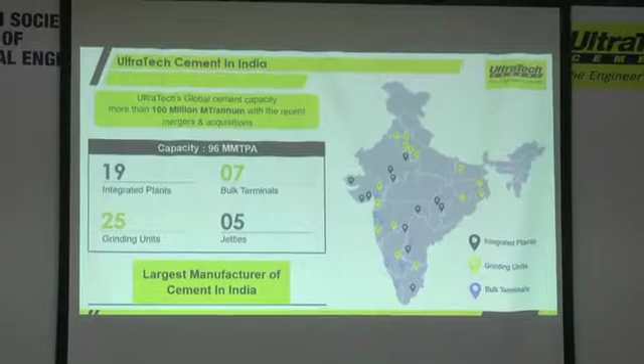And we feel proud to get associated with all the projects using Ultratech, and there are many signature projects constructed with Ultratech cement. We also feel proud to be associated with the development of India by making our cement available each and every time to all the projects which are getting constructed in the shortest possible time.

Along with India, we also have production units outside the country. We have our production units in UAE, in Bangladesh, in Sri Lanka, and we are also exporting cement to various countries where it is getting used in their prestigious projects.

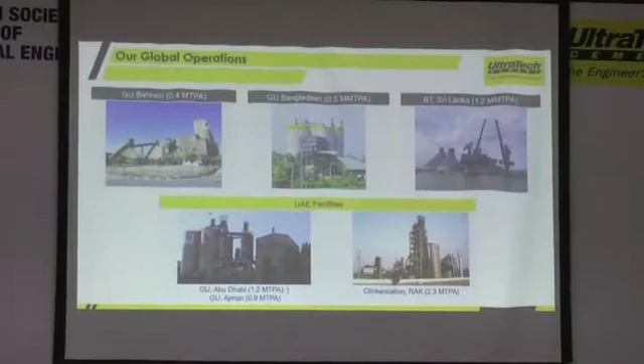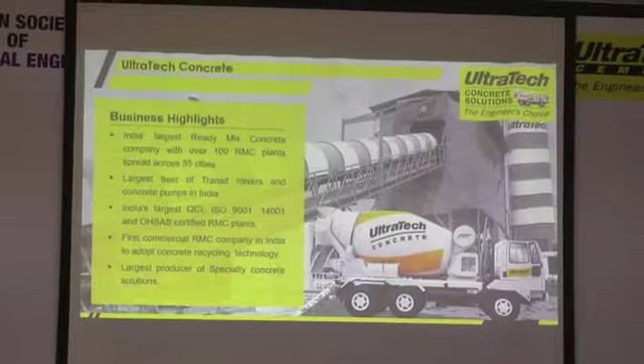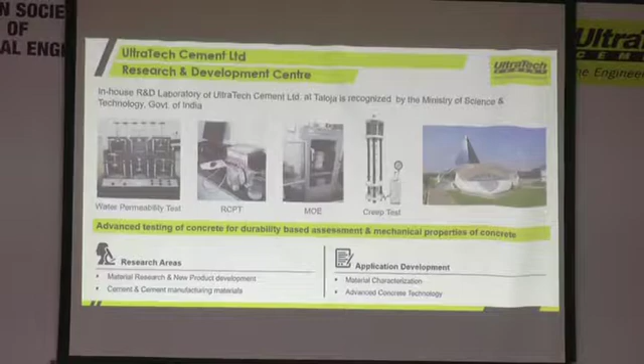Along with cement, we have RMC as a business. 100 plus RMC plants are there all across the country, and we are the largest manufacturer of concrete through our RMC plants, and we have the largest fleet of transit mixers also with us. We are producing a number of value-added concretes, apart from the normal concrete used at sites, and about 3 or 4 concretes we will have a presentation on very soon.

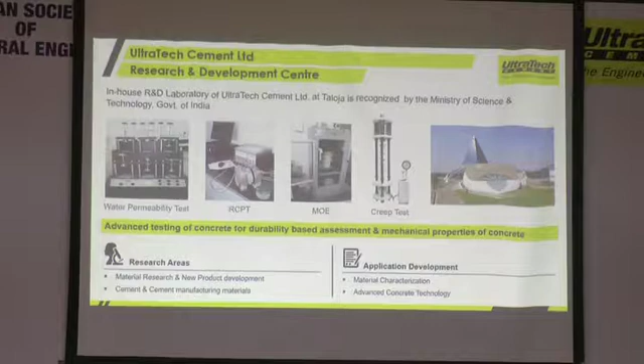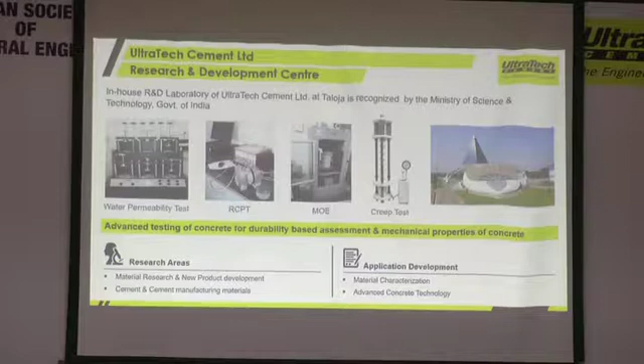We also have our R&D facility. We have developed our R&D center in Taloja, which offers a number of tests related to concrete like RCPT, rapid chloride permeability test, RCMT, rapid chloride migration test, modulus of elasticity test, permeability test, and so many tests offered through this laboratory. We are constantly doing R&D on concrete, and the results are also shown through our RMC business.

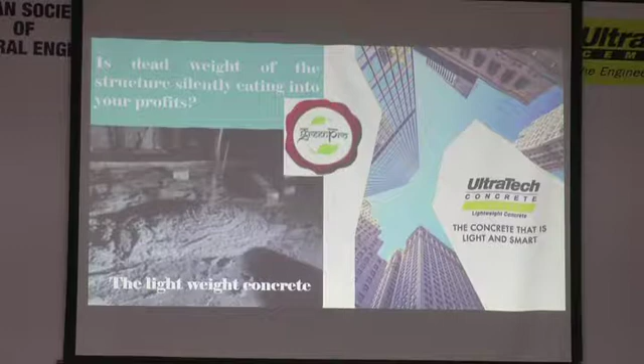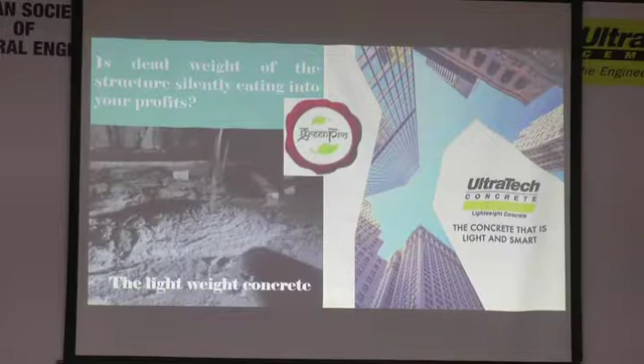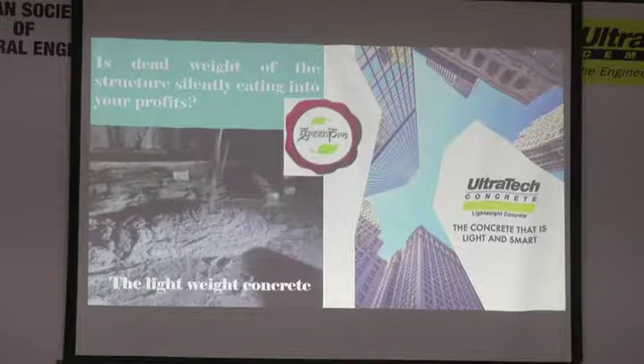We also have a building products division through which we are manufacturing and supplying AAC blocks, autoclave aerated blocks, along with dry mix products like plastering products, tile fixo, adhesives, waterproofing products. These products are made available through various outlets in Mumbai, and apart from Mumbai, all across the country. Now for this concrete product presentation, I will request Clinton to please come on the stage.

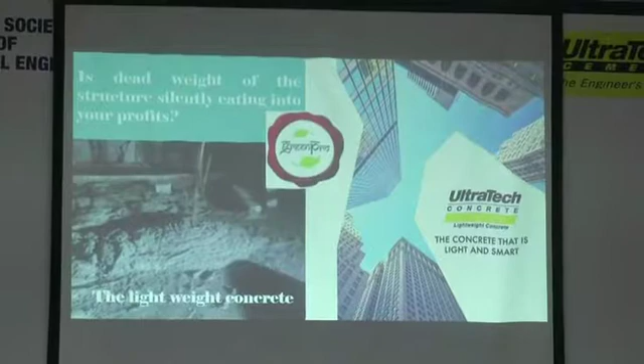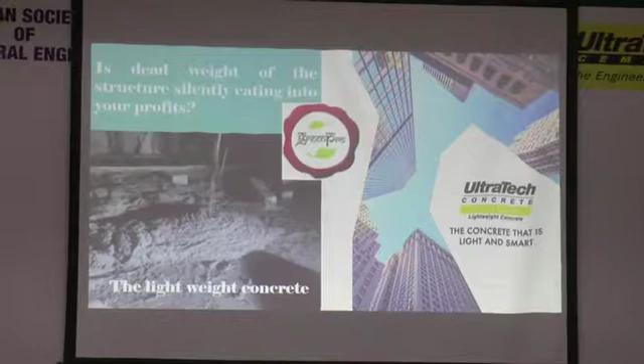First, what I'm talking about is Litecon, branded by Ultratech as Litecon - a lightweight concrete. Our concrete today has a density of 2,400, and that high strength is required for structural applications. But for non-structural applications, we don't need such high strengths, so we ask: why increase dead weight on the structure unnecessarily?

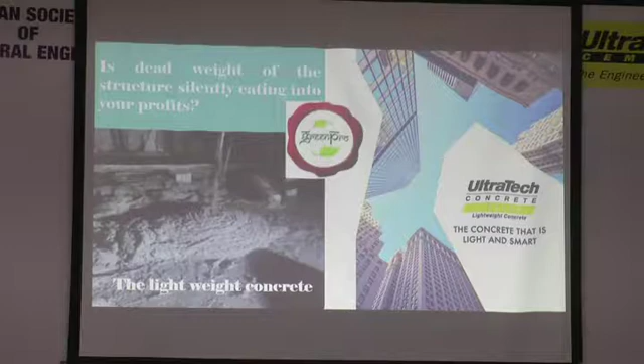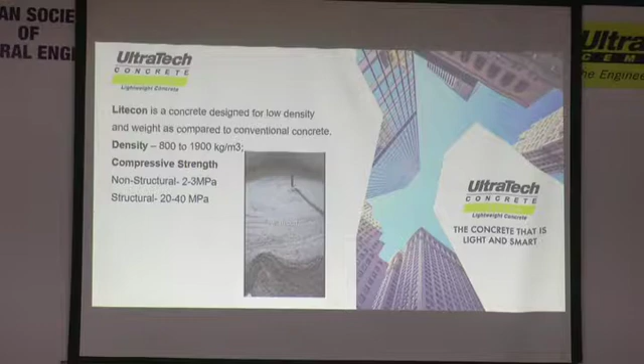This program is for the Indian Society of Structural Engineers, and many structural engineers say they don't require such heavy dead loads for all applications apart from structural concrete, so why not give them lightweight concrete? At Ultratech, we have designed and supplied concretes with density as low as 800-900 kgs per cubic meter, non-structural, gaining strength of around 2 to 3 MPa, and structural grade up to M25 with density around 1800-1850 kgs per cubic meter.

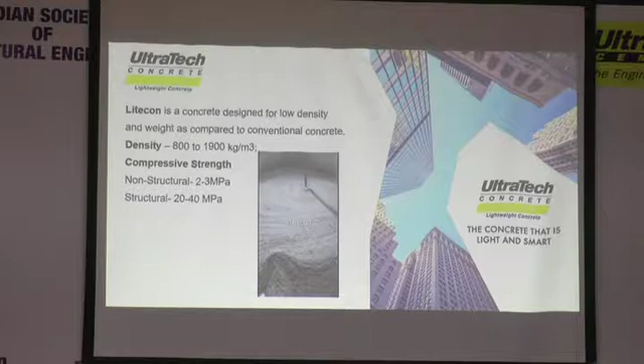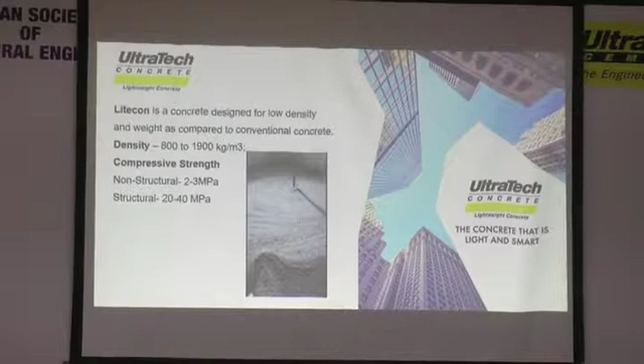With this drop in density, you get flexibility. Structural engineers can have flexibility in designing certain areas and reducing dead loads of structures. I'll take up one example.

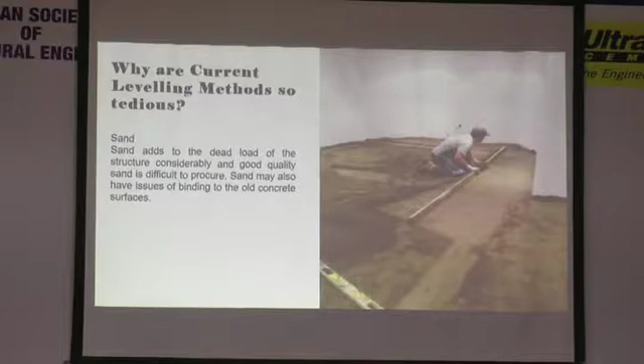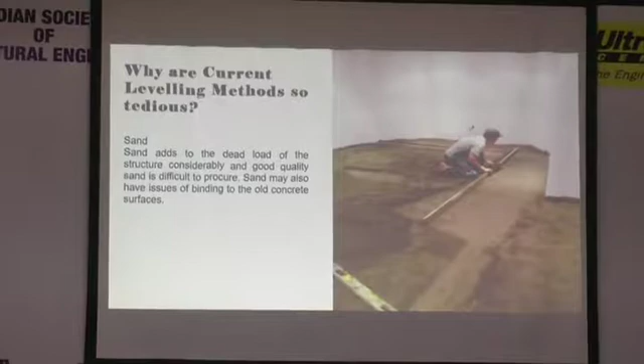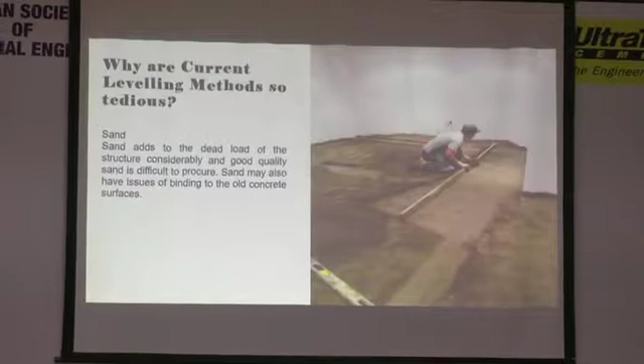Today for tiling, we have a traditional way - we go for sand bedding. If tiling had to be done in this room, sand would have to be brought from the ground floor or first floor up to this second floor, dumped at site, lifted - very labor intensive - then placed across the whole area, leveled, and finally you make cement slurry and paste tiles on it.

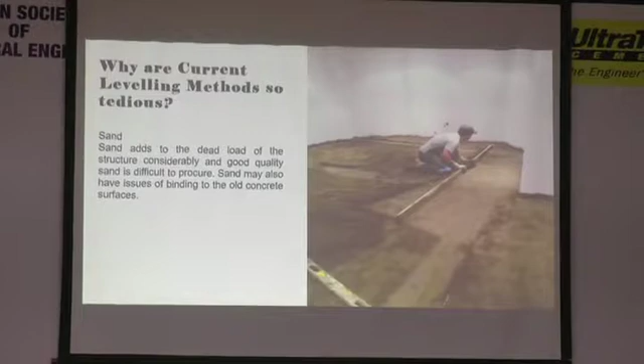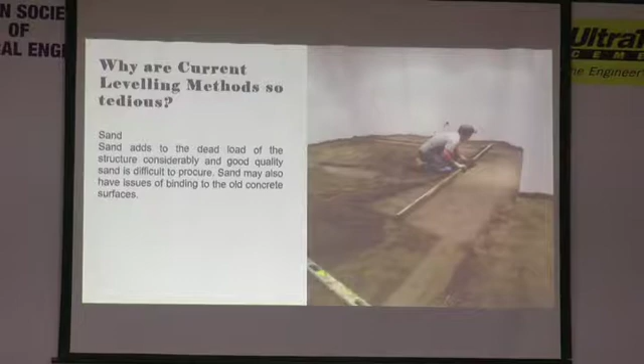Sand has a density of around 1800 to 1900 kgs per cubic meter, increasing load on your structure. We say use a material with density of say 800-900 kgs per cubic meter - a lightweight concrete. Structural engineers get the benefit of reduced load across the entire flooring area of the structure.

Second, it's fast, because lightweight concrete is placed through pumping methods. The transit mixer comes, it's pumped and placed on the floor, and you can go down to a thickness of 50 mm. Once that concrete dries, after maybe 7 days, your tiles can be stuck using either tile fixing agents or cement paste.

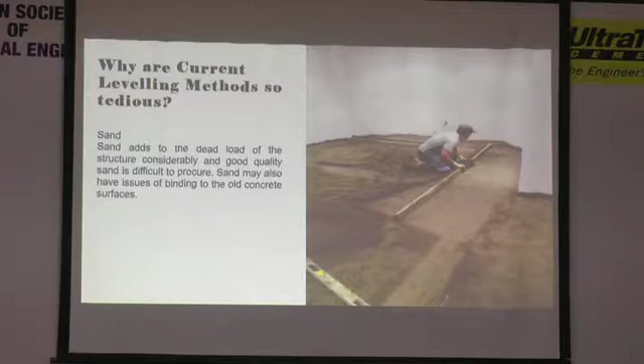When you leave this room, we have a sample lying there you can look at - 50 mm lightweight concrete with tiles stuck over it. 3 tiles are stuck with cement paste, and 3 tiles are stuck with our Ultratech Tile Fixo. This is how we reduce dead weight on the structure.

Now some people will ask, is it cost effective? Because that is a secondary consideration.

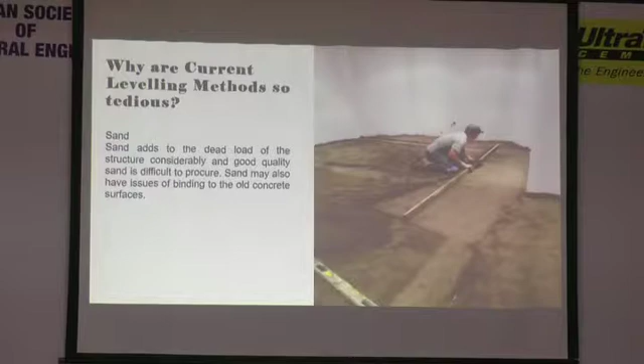I know as engineers, when we have to propose certain things, they ask, is it cost effective? So just see this.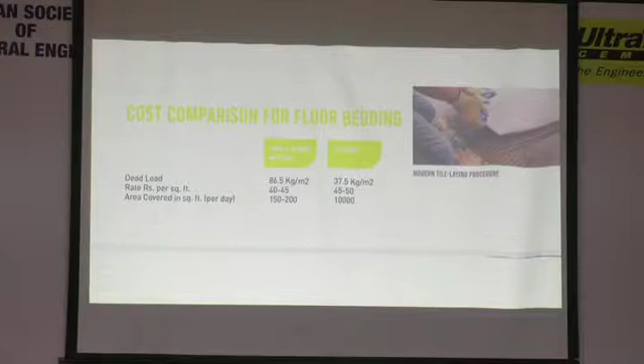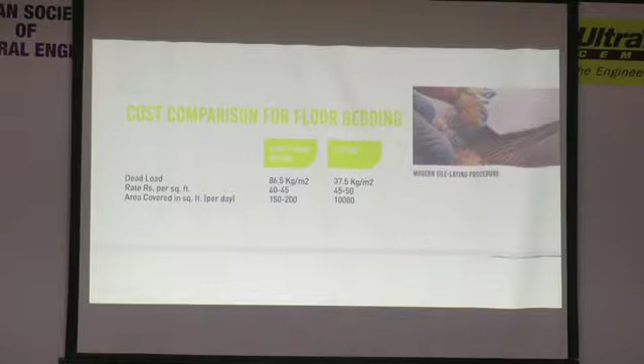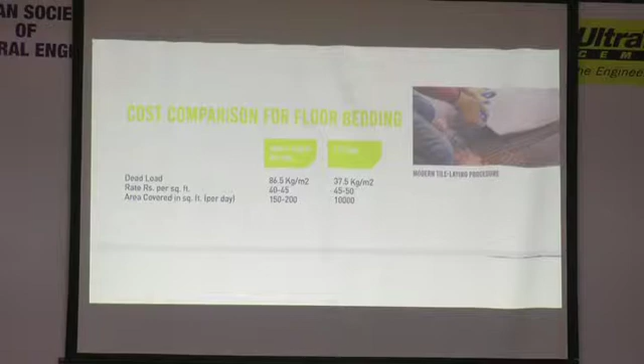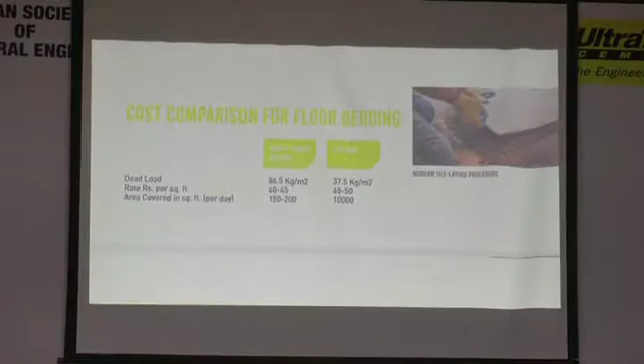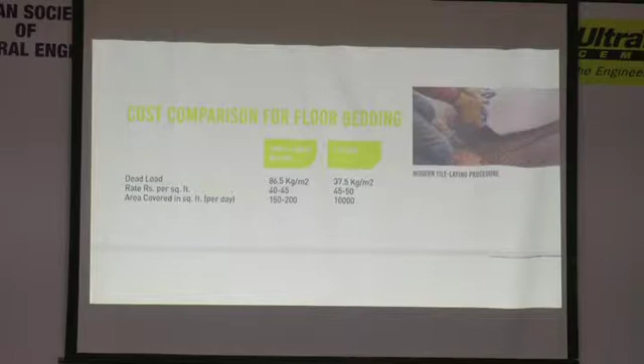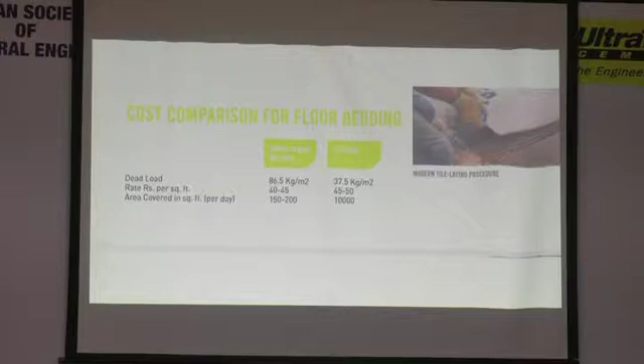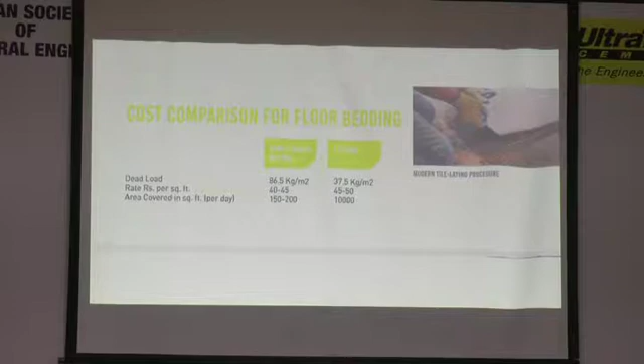Price-wise, we are considering sand including labor and all intensive costs, so this concrete will come almost the same price as sand plus the labor for carrying and lifting it to that floor. The area you can cover with regular sand lifting and labor in a day is 150 to 200 square feet, but with lightweight concrete through mechanized means, you can cover almost 10 times that. This is one area we want you to think about - why increase dead load of the structure when we have innovations in concrete?

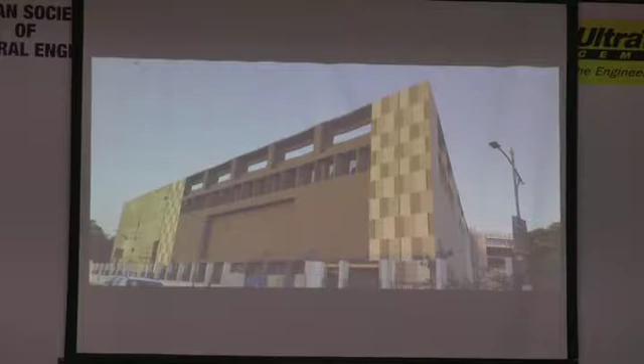This was one area. Now many malls and IT parks don't do flooring - tiling, that is. Over the slab they may put a layer of screed, then a carpeting area, and that's how it's given for the entire IT industry. They will do some wooden flooring and place all their furniture on that.

This is one mall - last month we completed Elpro Mall in Pune. The client wanted this entire area handed over. They said if we put a screed of say around 75mm thick, it would add weight to the structure, and second, it would be time consuming, and they only had to layer carpet over it and hand over to the client. So we approached them with the option of lightweight concrete, 50mm thick. It was very fast concrete, and in 7 days they put carpets, wooden partitions, and handed it over to the client.

No doubt this dead load calculation was not taken into account for this structure because it wasn't designed earlier, but this was a benefit of early finishing which they would not get with regular screeds.

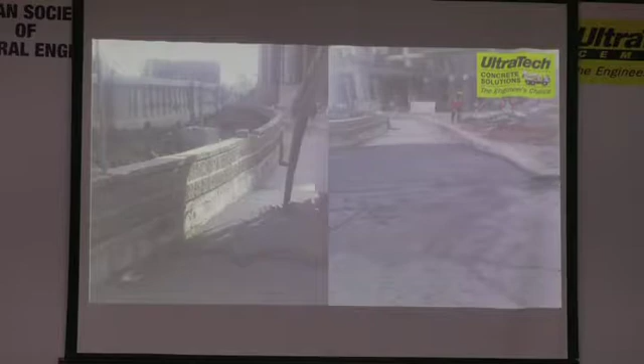All your filling areas - this is one podium slab, but all your sunken slabs, bathrooms, toilets, we fill today. This is the system.

Terraces, we put brickbats and think these brickbats will give good waterproofing, but that is a myth. Brickbat will never give you waterproofing - it is only to give you slope. What you're doing is treating the slab with chemicals, then over that the screed you put is mixed with chemicals, and that actually helps with waterproofing. Brickbat is only to maintain slopes so you can drain the water, because your slab cannot have the slope required on its own.

So when you use lightweight concrete, it not only decreases dead load but also improves heat insulation. With terrace slabs, AC bills go high and you feel more hot - that's why people say they don't want the top floor. One issue is leakages, and second, because the slab gets hot, your AC bills, fan bills, electricity bills go very high.

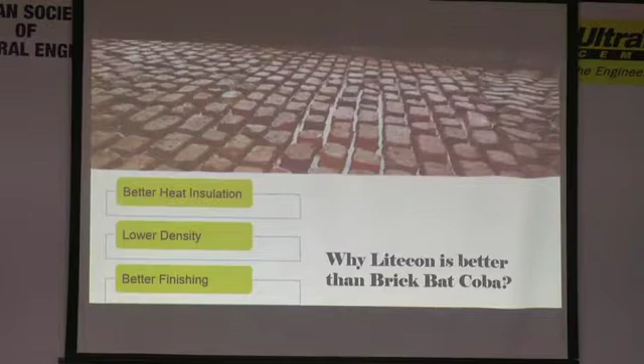We adopted this in Nagpur, tried it in individual bungalows - first treating the slab with waterproofing chemical, then treating this and putting a small screed or china chips. It has been found very good for individual bungalows, and we are trying to share this concept with many builders, that this is a product which will help rather than going with the regular product.

So this is all non-structural lightweight concrete. That is why we are saying there are innovations where we don't always require the same 2,400 kgs per cubic meter concrete for all applications. It can be used for non-structural applications. Now I know some designers are also using composite structures, steel composites.

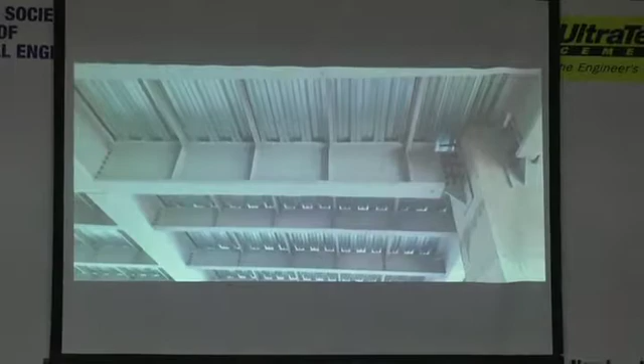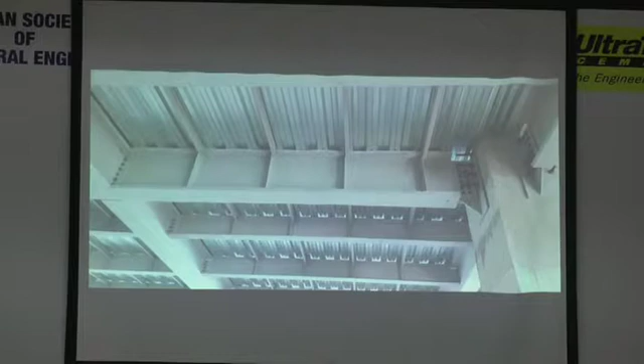Like this you must have seen somewhere - some metro buildings, some data centers, they are going for this type of composite structures, where you use steel beams and steel decking, and there you place a nominal steel and place the concrete.

Now there are international consultants abroad. Whenever they use steel decking, they don't want a concrete with density of 2,400, because that leads to unnecessary weight on the entire decking system. So they want a concrete which will be at least minimum M20 or M25 grade. So this is the option we are given.

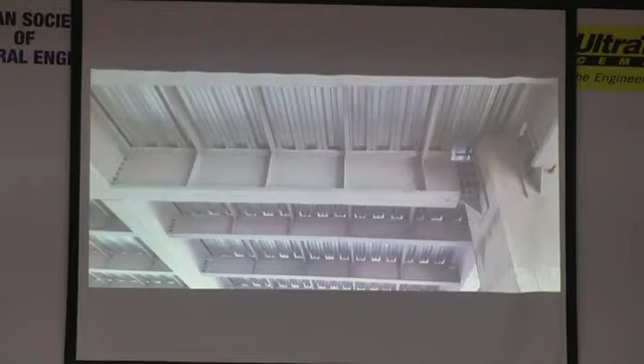This is a data center in Airoli. This was the entire flooring and the steel, and we have placed a structural lightweight concrete which gave us strength. It was designed M25, and we got 28 days around 38, 39 MPa.

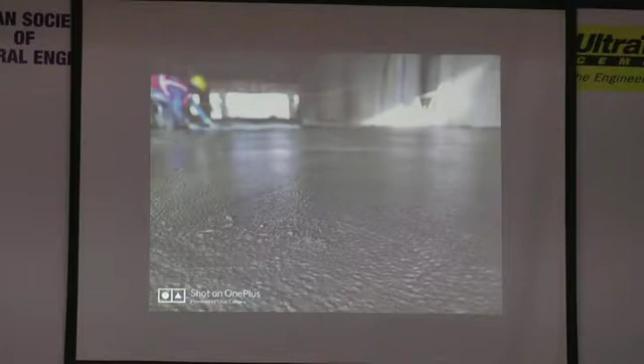This is again a very green concrete, because instead of your regular aggregates, we have used sintered fly ash aggregate for this concrete. And with this concrete, we could get a density of around 1850 dry density.

This concrete is available because when the designer was Arup, they were looking out in India for where Indians could also design and produce this concrete. When international designers come, they wonder whether we in India know how to produce these special concretes, because they have a mindset that Indians can produce only regular grade concrete. But this is also produced, and it is now being manufactured and supplied commercially too.

So this is about lightweight concrete. Just last night I'll share one example - we did a non-structural lightweight concrete for JSW in Dolvi. They had an entire nitrogen chamber, and at some levels they had to place just a concrete with a density of around 1,000 kgs per cubic meter, having a strength of minimum 5 MPa.

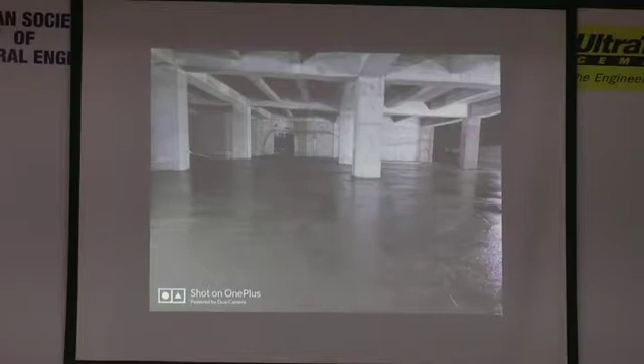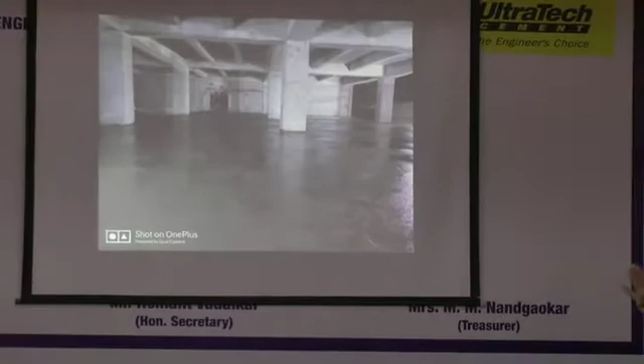It was a Chinese designer, because the entire thing has been imported from China, and they were trying to locate this here. We supplied it - it started in the night, and by morning we had completed 80 cubic meters. There are designers who want this type of concrete, and we have to give it to the market. So as structural designers, as concrete engineers, we have to design this concrete and give it, because internationally they use it, and they feel that when they come to India, Indians are not aware of these types of concrete, but this is available.

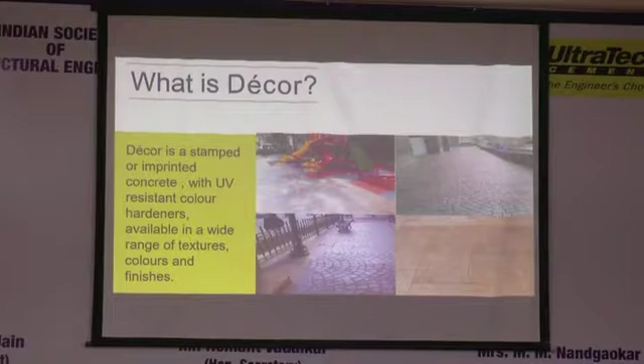Talking about giving color - a lot of architects think engineers cannot think designs, they can only think about strength and nothing beyond it. But we as engineers can bring life to that concrete by making a very small difference, by making your concrete colored and stamped. So a regular concrete, maybe M25, and this is what you can get. There are multiple options - this is just stamping done on regular concrete.

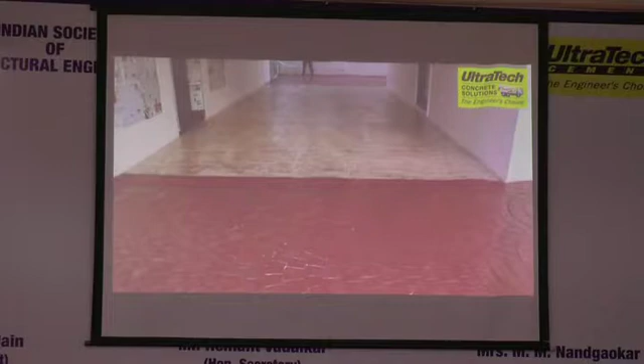Now what benefits? This is one bungalow we just completed last month in Kolhapur. So this is what we do. A regular concrete - if you see, this is how a regular pavement looks. Once it's complete, this is done at Reliance. So after it's complete, it gives you the total effect.

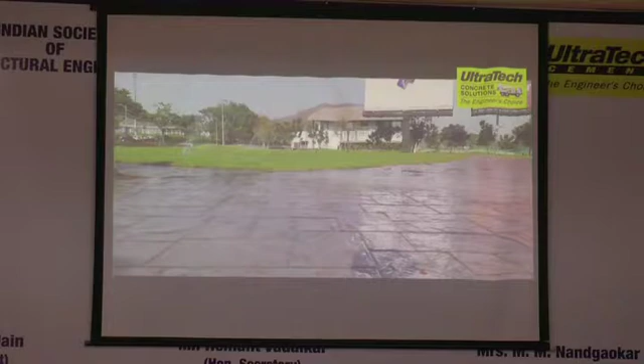So why go for tiles? Today when you lay tiles, after a few months or years, the tile starts coming out. You lay pavers, they sink, or sometimes they come out in one pothole, and the entire thing comes out. So why go for something else? Go for your entire concrete. Our base, as engineers, is concrete. So let's place concrete and give life to that concrete. This is how that entire concrete comes to life. I'll share one small video with you on how to bring dead concrete to life.

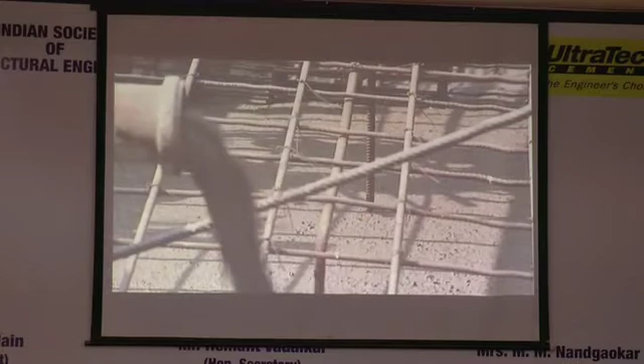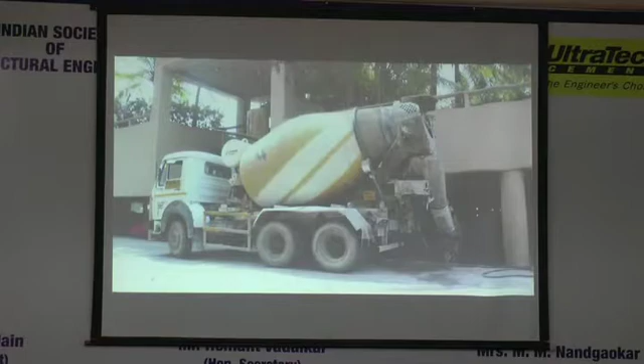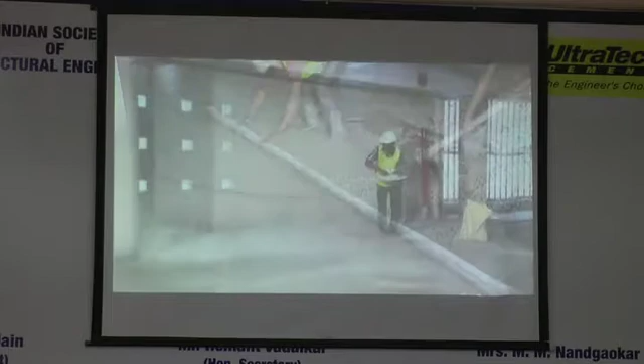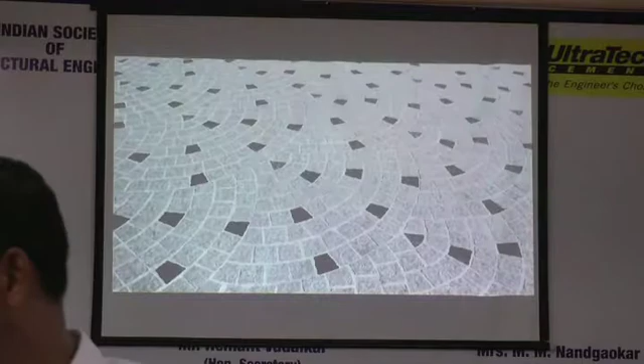Can you imagine intricately carved structures, mind-boggling colors, delicate designs, and UV finishes could also be created with concrete? Introducing UltraTech Décor from the House of UltraTech. Ultratech Decor is a truck full of magic available in a variety of shades. It fulfills the imagination of architects, turning their wish lists into reality. Consistent quality, UV-resistant pigments sourced from highly reputed manufacturers, and truly long-lasting shapes and colors are now available. Ultratech Decor not only enhances the appearance of a structure, it is also highly aesthetic, and its endless range of colorful designs are the ideal icing on the cake for all residential and commercial projects, as well as your small little palace too.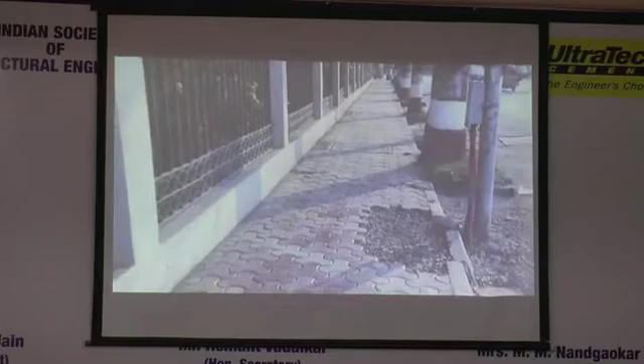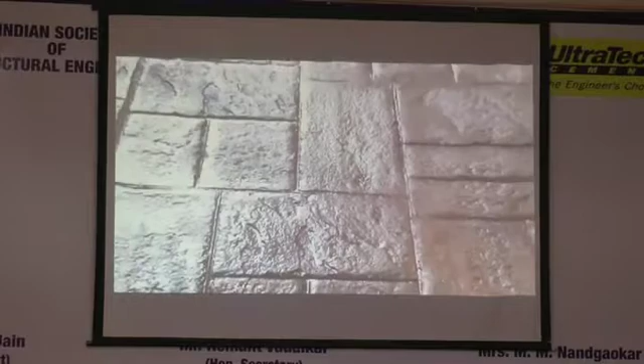Ultratech Decor is a far superior replacement to tiles and paver blocks and other pavement solutions, simply because it is in-situ concrete, carved and colored elegantly to give the feel and look of natural stones and blocks. It is designed to be stronger and extremely durable, hence has a longer and superior service life. Decor can be easily washed and will not get undulated over time. It prevents weed growth, which tiles and paver blocks cannot.

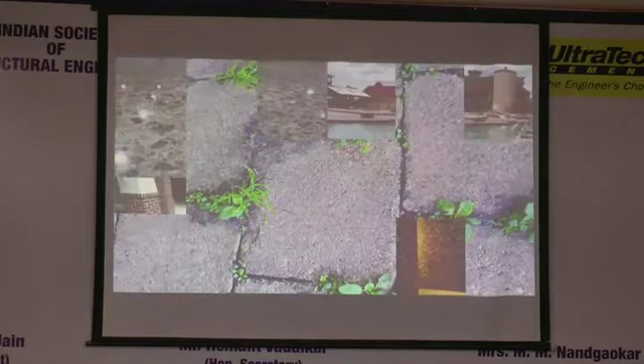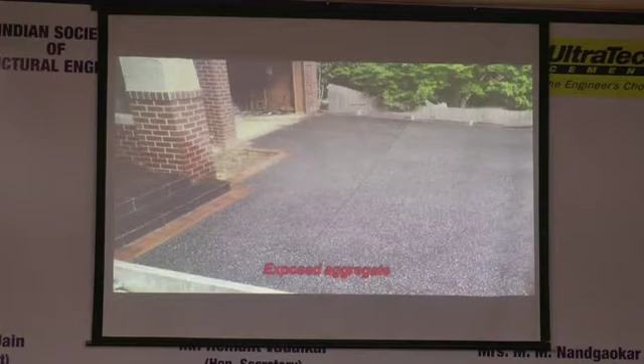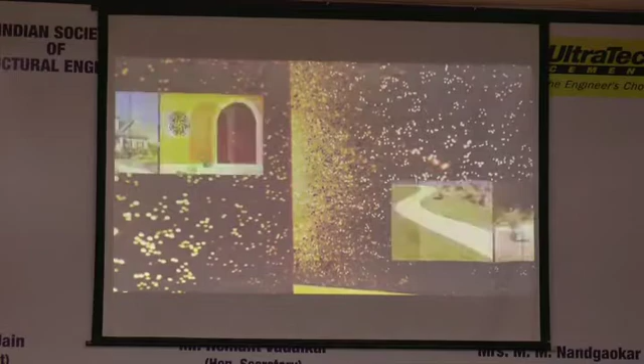We have also introduced further ranges of concretes in the architectural segment: polished, sandscaped, exposed aggregate, fair-faced, and most exciting of all is the translucent concrete, currently popular in many architectural applications world over. With Ultratech Decor, it's a promise that you can unleash your imagination and create icons which will be a visual treat to watch and dwell in.

So this is how we can bring life to concrete. Concrete is not, as we think, a dusty material. It can be brought life.

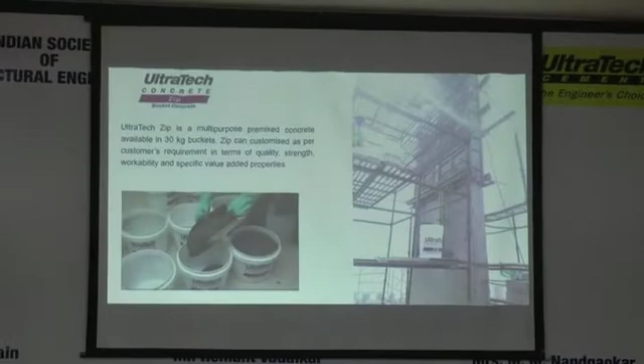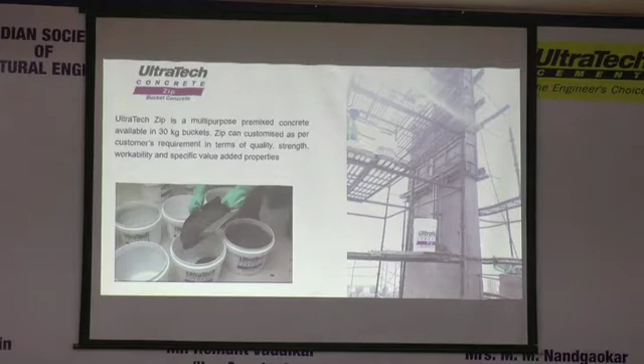Last one, just two more slides to go. This is concrete, what we say, concrete in a bucket. Mr. Vadalkar mentioned that when we are casting columns, people are using site mix. As per code, they've allowed 10% increase in cement, and you mix that concrete. One more big thing today is some good customers are using even ready-mix concrete for their columns. But how do you do starters?

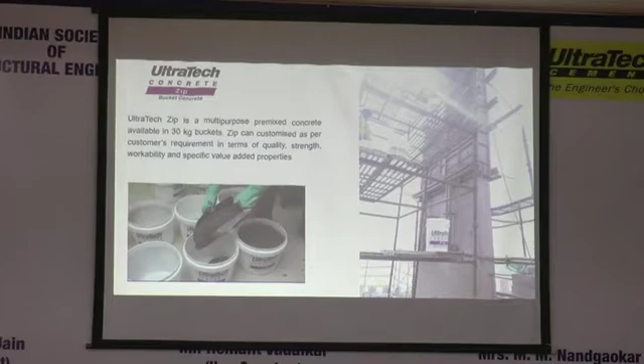The material required for starters is very little. You've got very less material. Then who's going to order concrete for a starter? So you say, okay, let's mix concrete at site by hand and place a starter. Now just imagine your entire concrete load is coming at that starter, which is a very poor concrete, maybe high water cement ratio concrete. And what is the fate of your structure then?

So we are saying that at various locations in Bombay we are supplying this, especially for starters or small columns: concrete in a bucket. If you have a column of grade M50, 55, 60, 40, whatever, the same grade can be batched in the batching plant and supplied in small concrete buckets, in small quantities, in 30 kilogram consignments, in Ultratech Zip, which is an ideal solution for concrete repairs of 0.5 to 1 cubic meter of placement volume at a time, saving contractors time and money.

So this is one thing you can have today. You don't have to go for your regular site mix concrete. This is available in small buckets of 30 kgs.

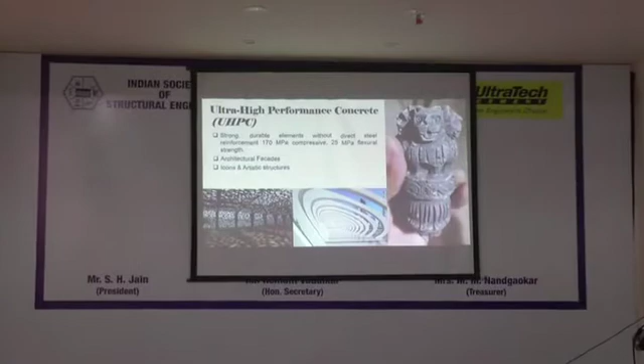So lastly, I would like to end with this: we have to be innovative. This is what you call ultra high performance concrete. Today we have manufactured and supplied successfully up to M95. We've supplied M80, and M95 also at one project. My colleague Amin Deshmukh was involved in Nathani Heights, at Byculla, and from his plant they consistently supplied M80 temperature-controlled concrete, and also M95 for a few columns.

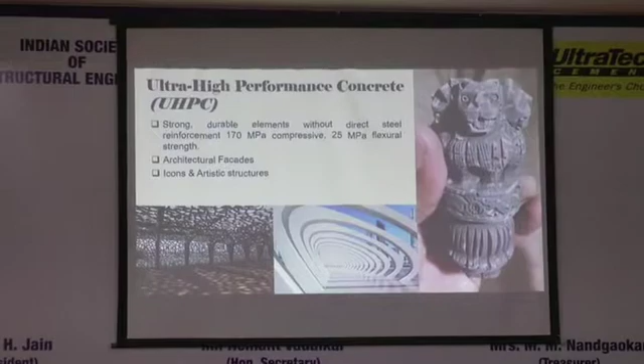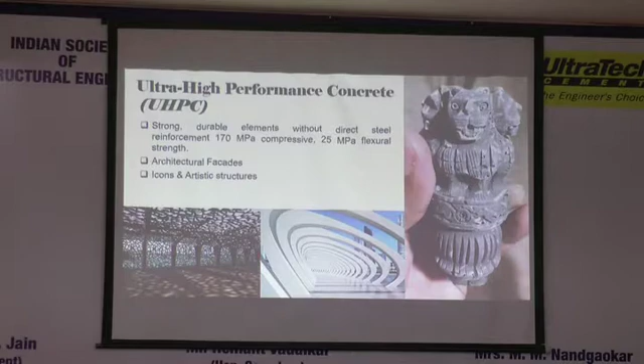This is ultra high performance concrete. We have manufactured this in the lab, and also taken it now for precasting. This is what we just cast last week, just to get a model of how sharp this concrete can come. So we cast the emblem. This is 150 MPa grade concrete, having flexural strength of around 23 to 24 MPa. This is what we have manufactured, and this is where it will be used.

You'll have seen there are facades in buildings. If we go with regular concrete, it may come 100 to 150 mm thick facade, which increases dead weight. The second option is GFRC or ferro cement, where you can come down to 50 to 75 mm. With this material, going to grades of up to 150 MPa, we can come down to 30 mm.

So facades you must have seen, we can make it in concrete as well with such high grade concretes. This is what I want to leave you all with as a thought: as engineers, we need innovation. We not only need to design in the lab, we have to get it to the industry, and we want people like you all to implement this. Because as concrete designers and manufacturers, we can make it, we can produce it, but we want structural engineers, developers, engineers like you all to take it and implement it at your site. That is how we'll help the entire engineering fraternity.